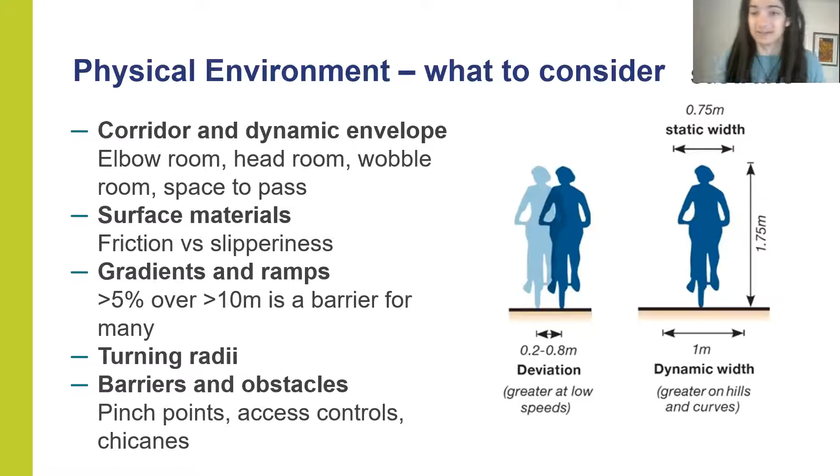Turning radii - I'll go to the next slide for this, it's the same slide with a different picture. The turning radii is going to be affected by how long your vehicle is and how long your wheels are.

And then of course we have barriers and obstacles. A pinch point is basically anywhere where the path just comes in like that. Access controls are often put in with good intentions, but just don't work very well.

And then we've got chicanes, the classic - you think of the two guardrail setup where the idea is to slow people down from rushing around with great abandon on their bicycles. But actually they're just really hard to get around, depending on what kind of bicycle you're using.

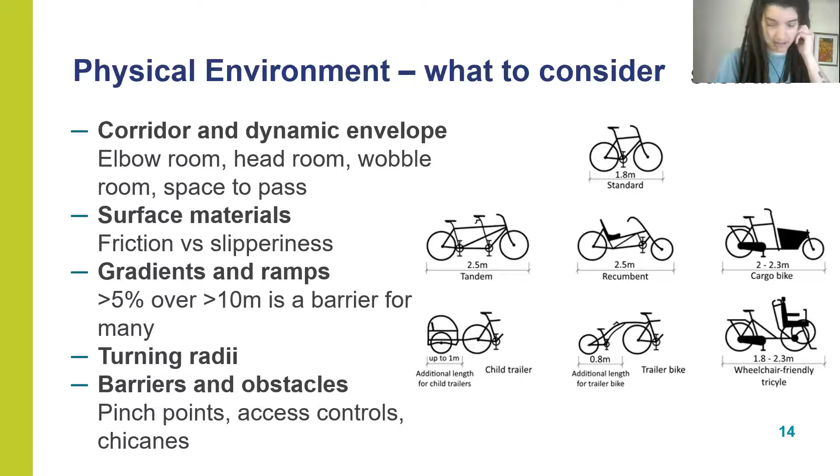Just to exemplify all of the above and talk a little bit about the importance of width when it comes to cycle routes - just a few examples of the kind of typical widths that people typically need, and what you can get into that width of path, who can use it comfortably.

So we often talk about 3 meters wide being kind of baseline, and this is the reason. So I've got quite a few slides now to talk more visually about some of these things.

I have to lubricate the old vocal cords so I can keep up the momentum.

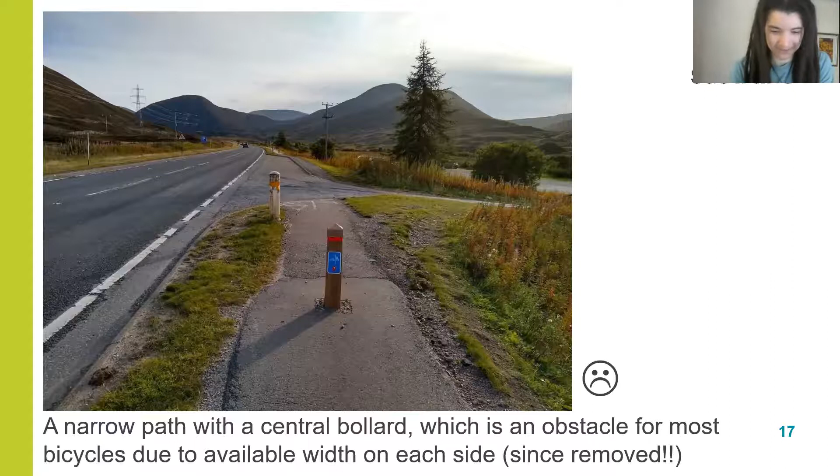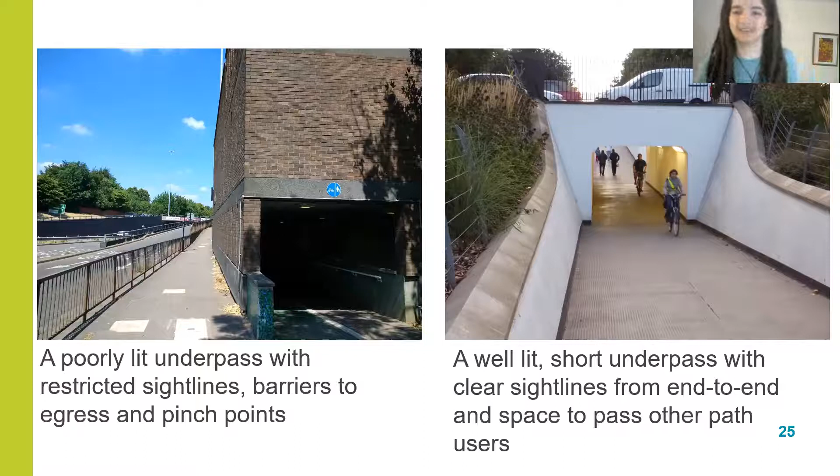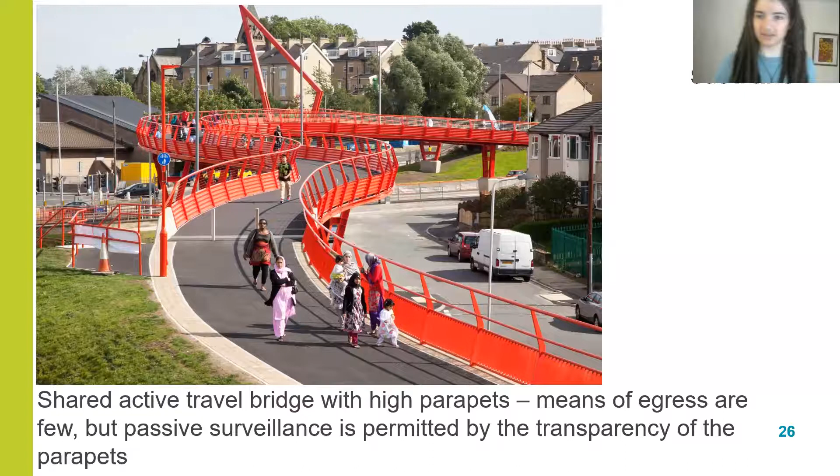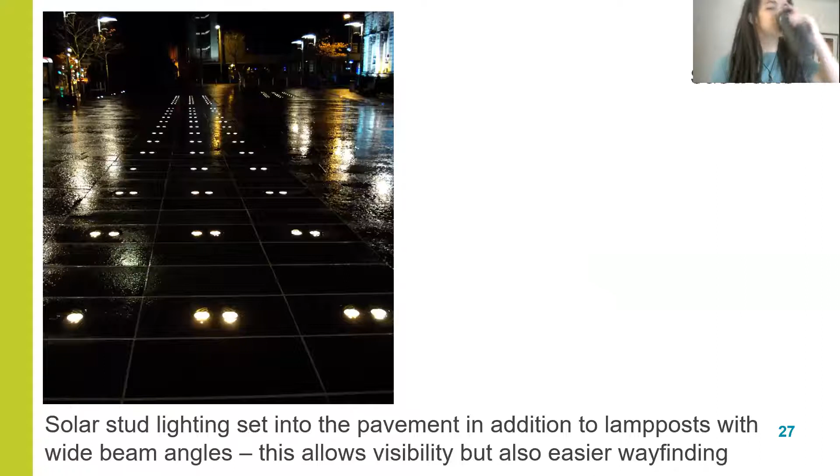So now we move on to the community engagement and co-design section. All of the above—everything we've just discussed—is best implemented by designing with the people who are going to be using these specific groups.

There are different ways of consulting with people. The statutory minimum consultation is quite a passive thing. If projects are coming forward, designs are often concocted before they've actually engaged with folks about it, and it's really passive—you put an advert in the local paper, publicize it online, and that's the kind of minimum requirement, as well as going to statutory consultees like community councils.

But the key thing is designs sometimes come before engagement, and once that's happened it's much harder to go back and redesign based on feedback received, because there's going to be resistance to redesigning from scratch once you've put a lot of hard work into it. So make things easier for yourself by engaging before you start designing.

The best practice we'd advocate for is community engagement in advance of the design—do a world of research by engaging with many stakeholders and gathering all their feedback, and do it proactively. Create a stakeholder map, a list of stakeholders, and include everybody.

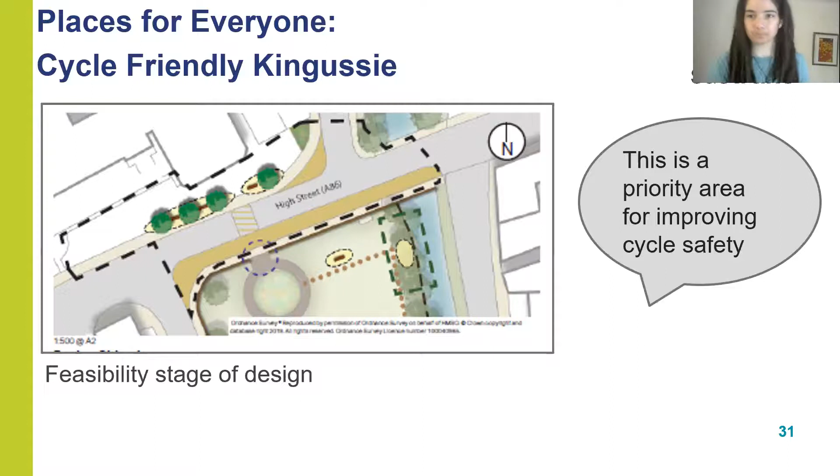We went to the concept design, and feedback from the public was that they wanted to maintain it as a memorial space because it was a memorial garden. They also wanted to see some seating provided.

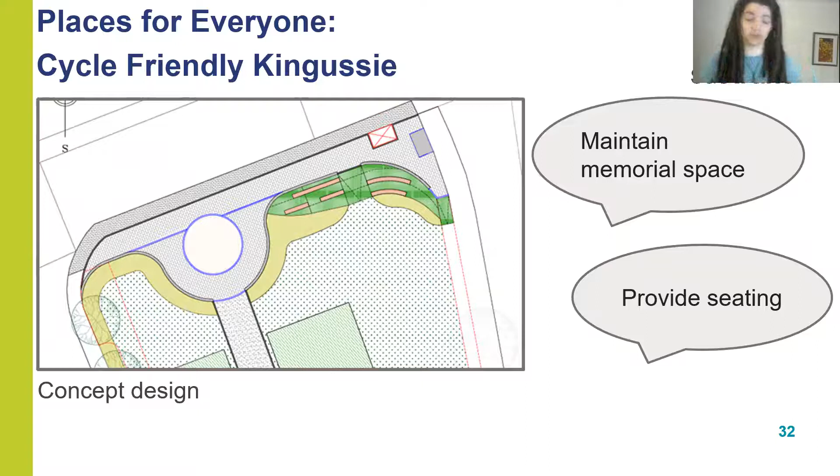We went to develop design, and the question was, can we create a loop so that children can practice on their bikes safely? Another one was, we need more cycle parking. So that was included in the design as well.

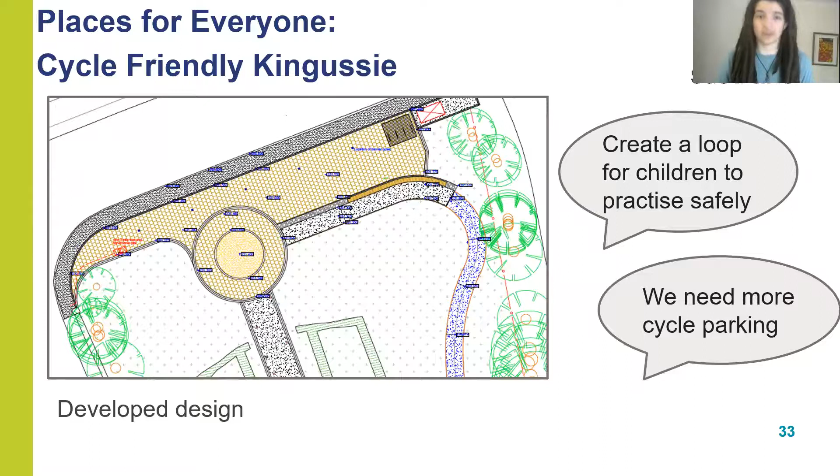As we got to technical design, this is when you start getting showered with designs of every little nut - all the little nuts and bolts are designed out.

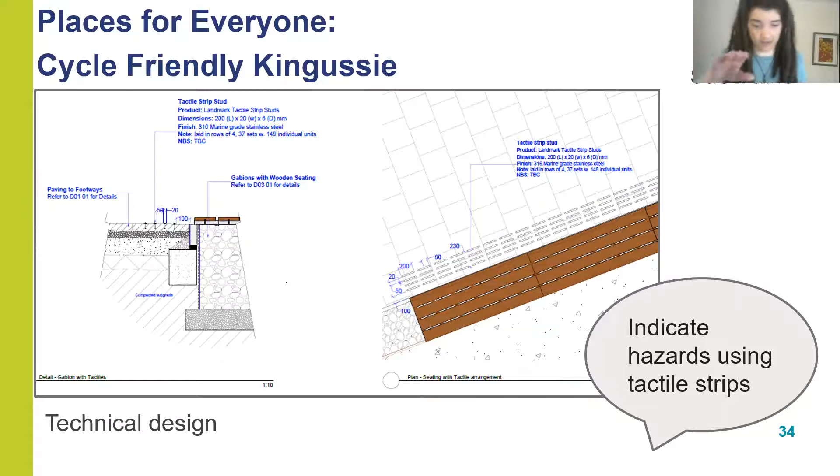At this point, it was indicated that the seating, which is parallel with the ground, could be mistaken as a pavement by somebody with a visual impairment. So we started to include tactile strips to indicate that there's a drop after the seating.

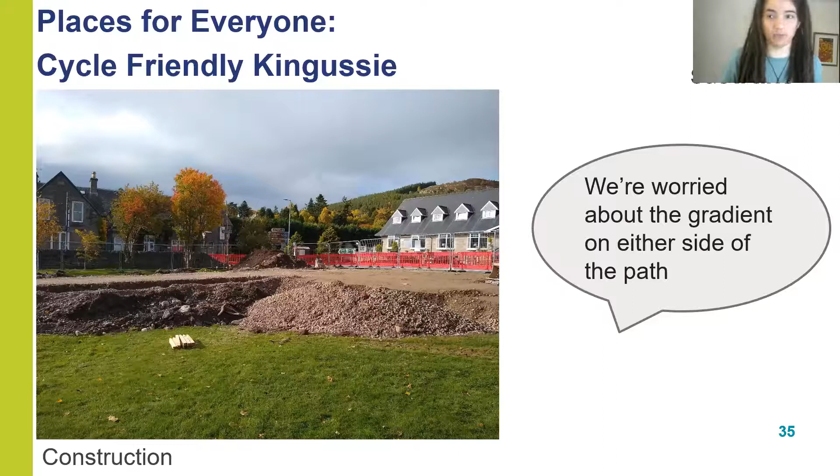Then we were actually constructing it, building the thing. The folks who were visiting the site during construction were saying, well, we're actually quite worried about the gradient on either side of the path - it's not really allowing for wobble room. So in response to that, it was all backfilled to level everything out.